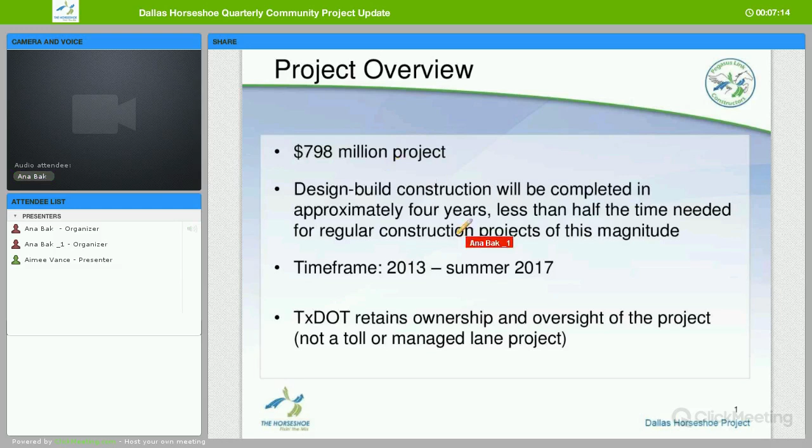The time frame of the project is 2013 - we started around April 2013, and the project will be completed in summer 2017. The project is a TxDOT project. They will retain ownership and oversight of the project once it is completed, and there are no toll or managed lanes involved in the construction of the Horseshoe Project.

Our project team consists of TxDOT, who is the owner, and then Pegasus Link Constructors, or PLC. PLC is a partnership between Fluor and Balfour Beatty Infrastructure.

Now to talk about our project limits - here's a project map showing where the construction of the Horseshoe Project consists of. If you look to the west of the project on I-30, you'll see the project starts there. Our outer west limit is at Sylvan Avenue. Going north on I-35E, the north limit is at Commerce Street.

Going east, our eastern limit is close to Cesar Chavez through the canyon. Going south, down on I-35E to 8th Street. So it's about a 4-mile corridor, but a very busy and congested corridor of traffic near downtown Dallas.

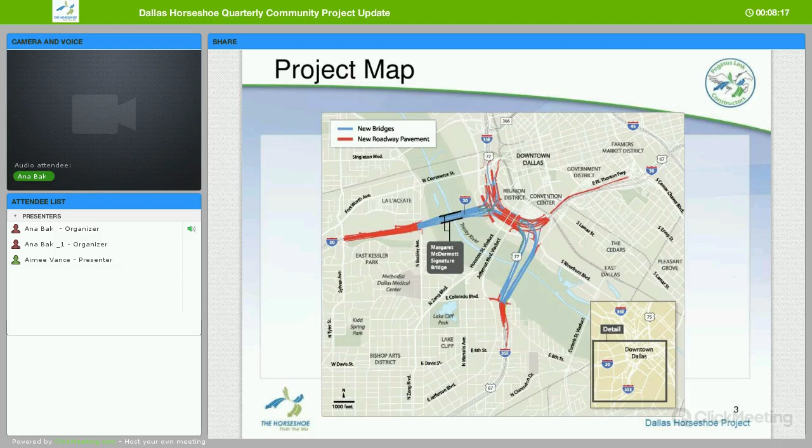Now we want to talk about the purpose of the Horseshoe Project - why is TxDOT doing this project? For many reasons. One is to replace many of the bridges across the Trinity River and along I-30 and I-35E. Some of these bridges were built in the 1930s and 1950s and need to be replaced.

Also, constructing additional lanes and frontage roads to increase capacity of the roadway in this area. We will also update the outdated roadway geometry of the Mixmaster, so it's easier to go from different highways and exits once the Horseshoe Project is completed.

The Horseshoe Project would also create new direct connectors for I-30 and I-35E. Our signature Margaret McDermott Bridge along I-30 is one of the signature projects of the Horseshoe Project. We also will increase overall mobility and safety in the corridor.

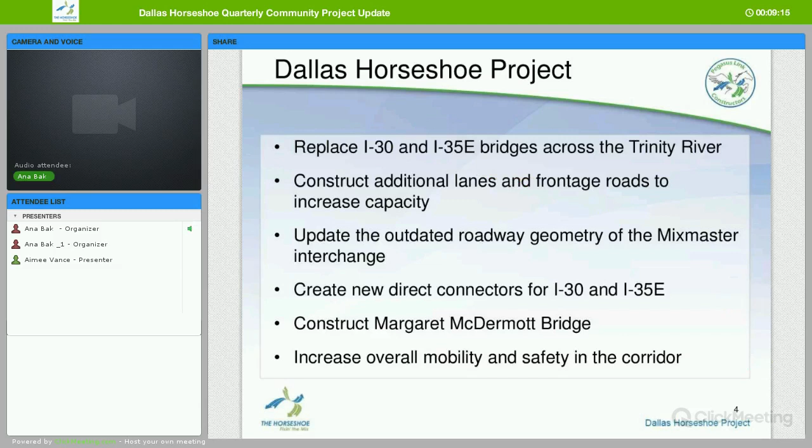Currently, some of our construction activities include along I-30, construction of eastbound and westbound frontage roads between Beckley and Sylvan Avenue. Then on I-35E near Colorado, construction of northbound and southbound frontage roads between 8th Street and Colorado Boulevard. In the Mixmaster, on northbound I-35E frontage road, construction between Hotel Street and Reunion Boulevard, and at Riverfront Boulevard at I-35E and along I-30.

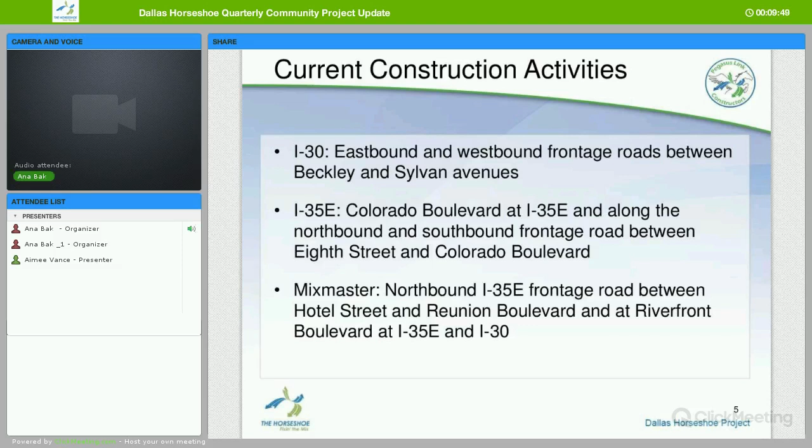For the proposed configuration of the project once it is completed, there will be about 48 traffic switches during the construction of the project.

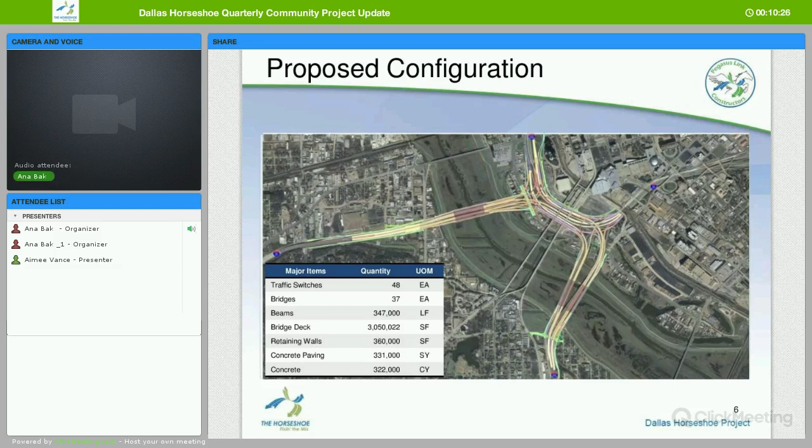There are also 37 bridges that will be constructed or repaired on the project. We have 347,000 linear feet of beams for the project, 3 million square feet of bridge deck, 360,000 square feet of retaining walls, over 300,000 square yards of concrete paving, and over 300,000 cubic yards of concrete for the construction of this project.

Currently, the phasing process where we are in the project right now is doing construction outside of the existing roadway. So if you're driving along I-30 and I-35E, you will see a lot of columns and beams being constructed on the outside of the roadway. Most of the construction is on the outside, so it's not really affecting main lane traffic.

At the end of 2014 and in early 2015, we will switch traffic on areas from the main lanes to the new frontage roads that are being constructed right now, mostly near riverfront. We'll get into more detail on our next slides of this project phasing.

First on eastbound I-30, there'll be a traffic switch for riverfront exiting to Riverfront Boulevard. The exit will now be further west at Sylvan Avenue, and you will exit there for Riverfront.

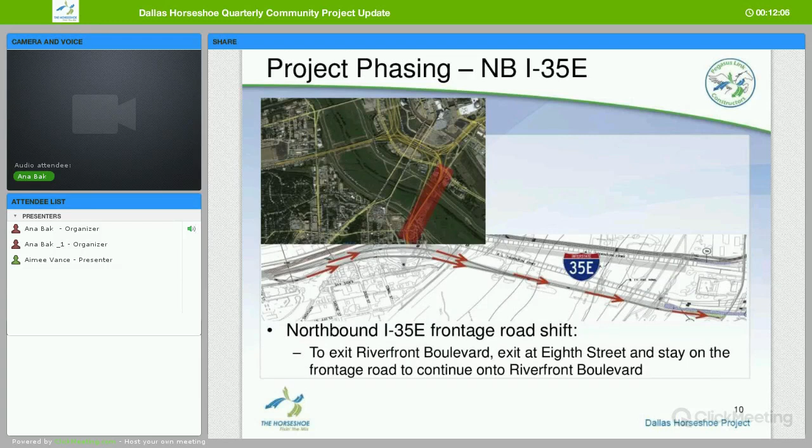Currently the project phasing for I-35E northbound, also to exit Riverfront Boulevard, you will exit now near Eighth Street and stay on the frontage road to continue along Riverfront Boulevard. These two traffic switches will take place later in early 2015, and notices will be sent out to stakeholders to let you know when those begin.

Continuing the next phase of the project for construction, later in 2015 and 2016, we continue to remove existing roadway and reconstruct some of that roadway. Then later on, reconstruction of the Mixmaster, and of course the final completion of the project in 2017.

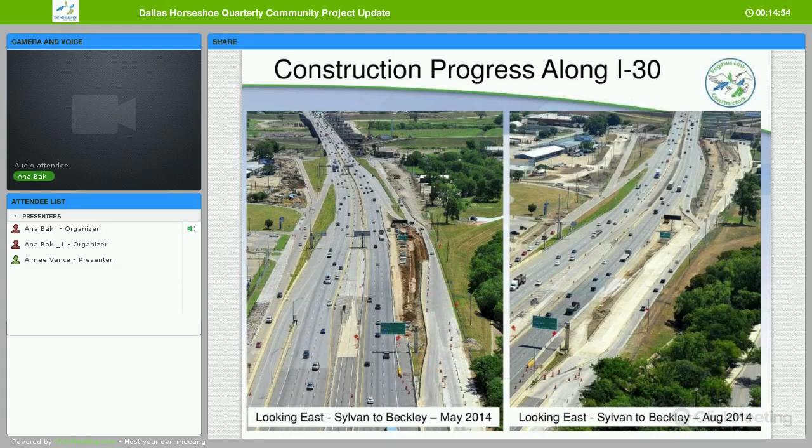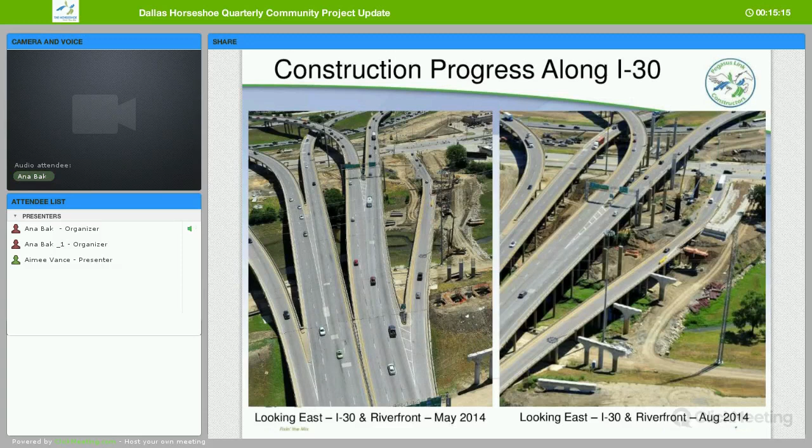This is the construction progress along I-30 at Riverfront. In May 2014, we're just starting to put up some of the columns, and then in August 2014, putting up some of the beams and starting some of the bridge work there.

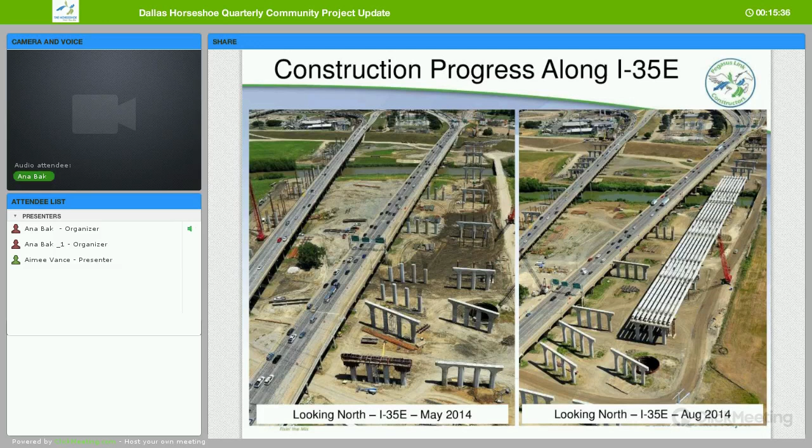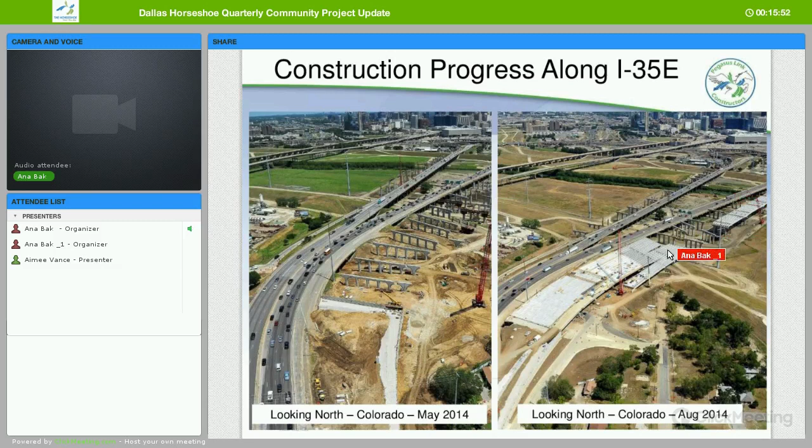Continuing a little bit farther south, near Colorado, in May you can see the columns being put up on that east side, and in August you can really see more of the main lane work and bridge work that we've completed.

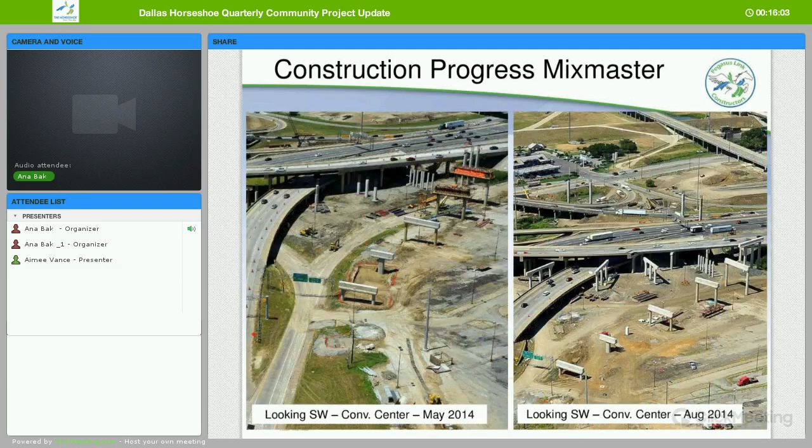This is down in the Mixmaster area near the convention center. Same thing, you can see a lot of the columns and beams being put up, and then in August you can see the progression of that work in that area.

This last one is another Mixmaster slide of the Mixmaster construction, near the Houston Street Viaduct.

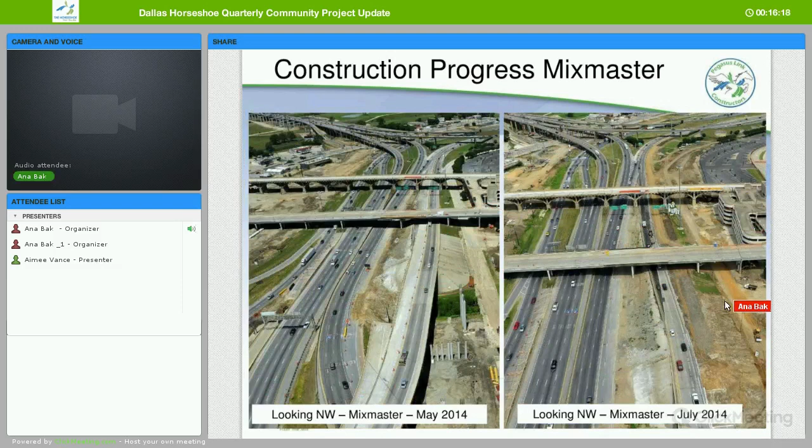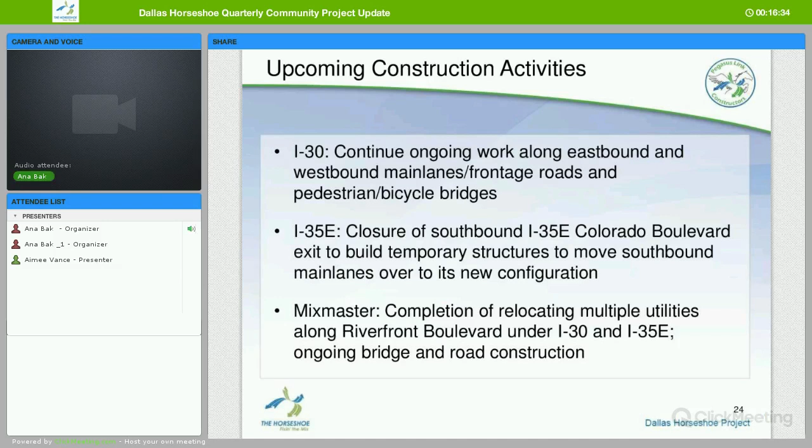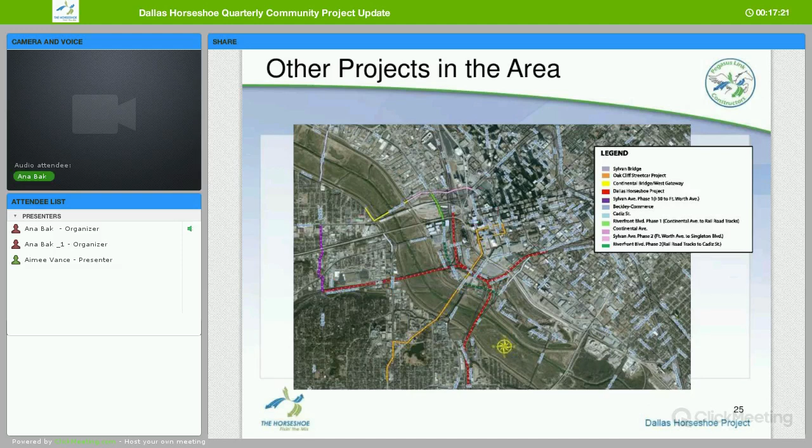So there are a lot of different projects down in this area, but we do coordination with all the different projects to try to make sure we can get traffic through this area without too many issues with traffic concerns.

Next, we want to talk about some of our outreach activities. One thing we do here with Pegasus Link Constructors, we've been really trying to increase employment opportunities with career fairs. We've partnered with Workforce Solutions of Greater Dallas and regularly participate in their career fairs to help hire a diverse workforce and participate in other employment activities through this partnership.

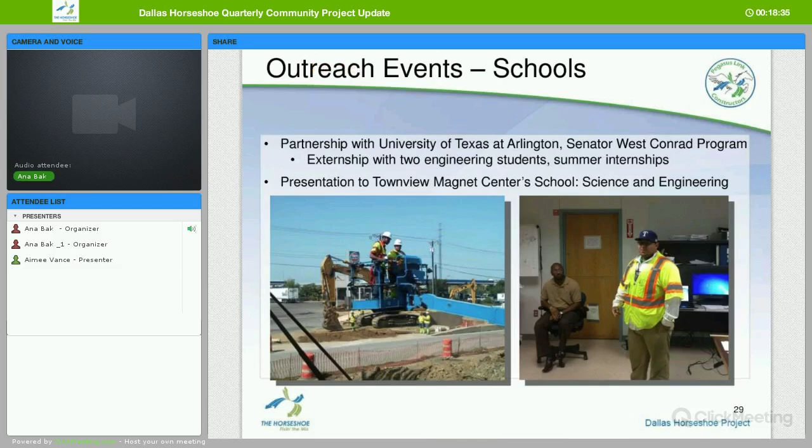We also do a lot of outreach with schools and youth. We've partnered with the University of Texas at Arlington and also the Senator West Conrad program to have externships and internships for the summer with engineering students. We've also given presentations at Townview Magnet Center School for Science and Engineering, having construction staff talk to students about what it means to work on a construction project and how they can pursue a career in construction and engineering.

In July, we were excited to have Congressman Marc Veasey out, as part of his Marc Means Business program for that month, at the Dallas Horseshoe Project, where he wanted to step into the shoes of a construction worker. He worked for the day as a concrete batch plant laborer, doing different testing of concrete and working in construction areas. We were very excited to have him experience what our construction workers experience every day in the hot heat.

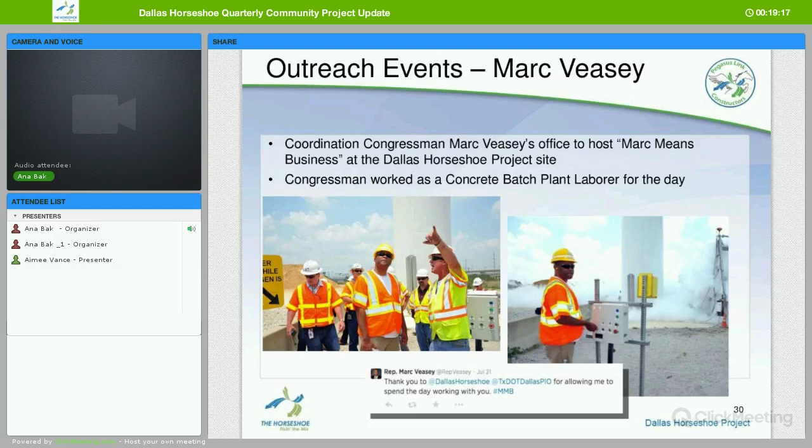Also for our project, there are many ways you can communicate with us. If you have questions, need additional information, or have any concerns, you can contact us through our website at www.dallashorseshoe.com, through our email at info@dallashorseshoe.com, or our telephone line, 214-FIX-MIXD, which is 214-349-6493. You can also sign up for our Facebook and Twitter pages and for text alerts if you want communications about traffic closures or other things in your area as a stakeholder.

That concludes our presentation for tonight. I hope you have a better understanding of where we are in construction. If this is your first time with us, I hope you now understand what the Horseshoe Project consists of. We'll be happy to take any questions.

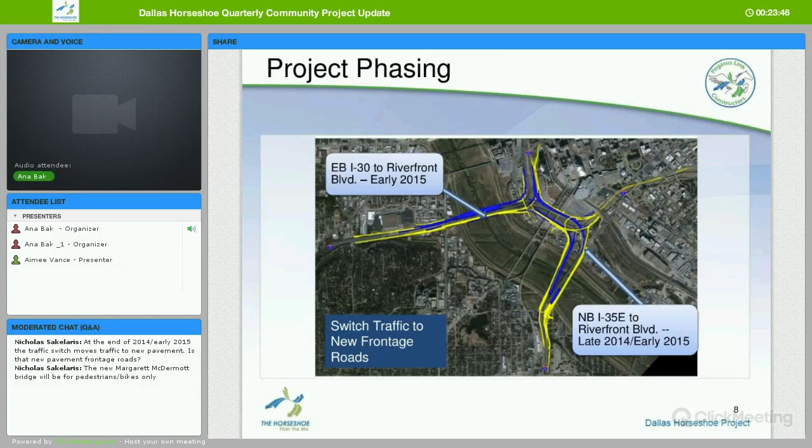We have our next question: will the new Margaret McDermott Bridge be for pedestrian and bicycles only? That is correct. This bridge is on the outside of I-30 near the Trinity River, and it is just for pedestrian and bicycle traffic. So it's not part of the roadway, it's on the outside.

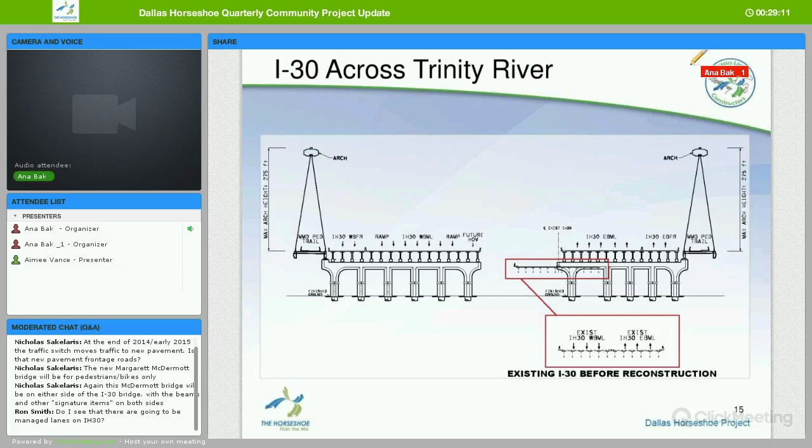Our next question is: do I see that there are going to be managed lanes on I-30? For the Horseshoe Project, there are no managed lanes, but the Horseshoe Project does connect to the west on I-30 with a project that will have managed lanes.